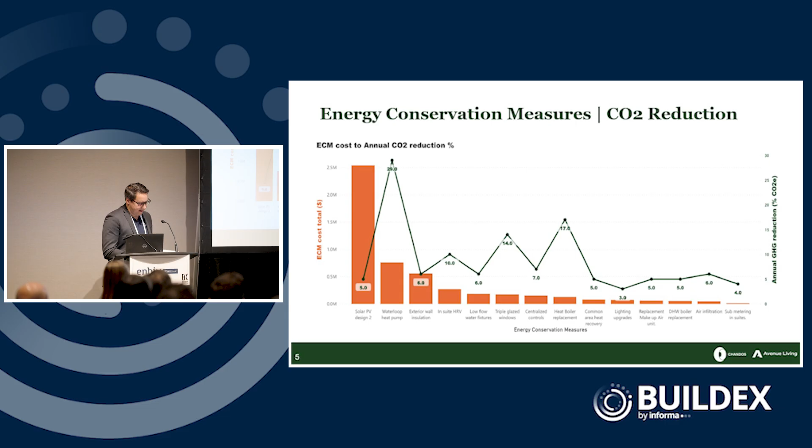Again, I think we're distributing these slides, so you'll get copies of all this, so I won't dive into too much detail on what we're doing here.

The next challenge we face is around decision making. We're living this in real time with phase 2 and 3 of our CIB program.

We're looking at probably 40 different properties. Each has an energy audit completed, and each property has a list of ECMs that we can select from—more or less a menu. Now we're in the optimization stage, trying to figure out which ECMs by property, and which buildings as a whole, to include in the program.

It's harder than we expected—really balancing GHG reduction and construction costs, since those are two items in tension.

The next challenge we face is investment modeling. I'm not sure if people have had projects axed because there isn't enough return created or enough savings—it's a challenge for us. When we first look at the savings, if you take your utility savings and the cost of construction, generally that simple payback just isn't interesting enough to get a yes on the project.

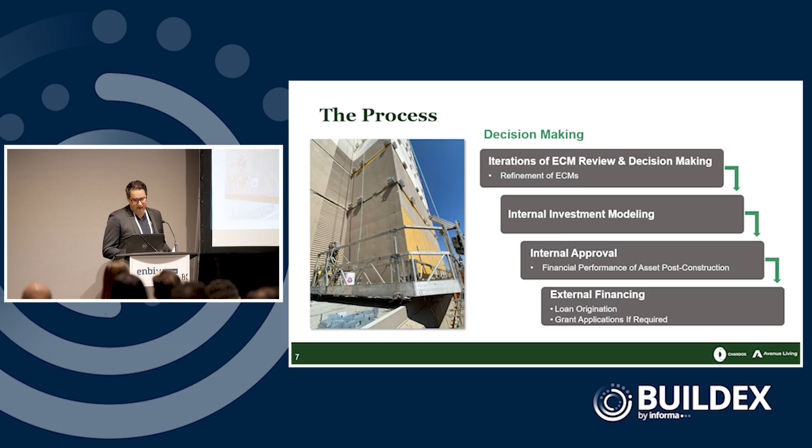Internal approval, for us it's straightforward. We have an investment committee, but knowing your approval path is very important to understand. At this point, you'd probably be nailing down your financing, getting term sheets, signing credit agreements, and also getting grants if you're able to.

This is my last slide, and we'll get it over to Dustin next. We've also built a program around this. So we talked about the individual process for an individual building, but our program has key components. One is due diligence, so we do energy audits on the properties. We also look at other things like hazardous materials, so we'll do assessments early on for asbestos or mold we might encounter. We'll look at environmental site assessments and building condition assessments as well. So we do a lot of front-end work.

We've built a team around this internally. We have what we call a steering committee for our CIB program. It's multidisciplinary—we have asset management involved, marketing, our operations team. We come together every two weeks or so and discuss progress and challenges. Most of our future projects are also in occupied buildings, so that's another logistical challenge for construction—a lot of communication between our marketing team, our ops teams, and our residents.

Lastly, at this stage you're probably going to start selecting either equipment or contractors. I think probably one of the more important stages is getting projects approved and moving into execution. I'll plug Chandos here—they're a great partner for us in this space. These projects are complicated, merging old and new, with lots of building code issues and unforeseen problems behind walls. So picking a partner you're comfortable solving problems with, having hard conversations with, is important. I'm happy to report we're extending the relationship into phase 2 and 3 of our CIB program with Chandos.

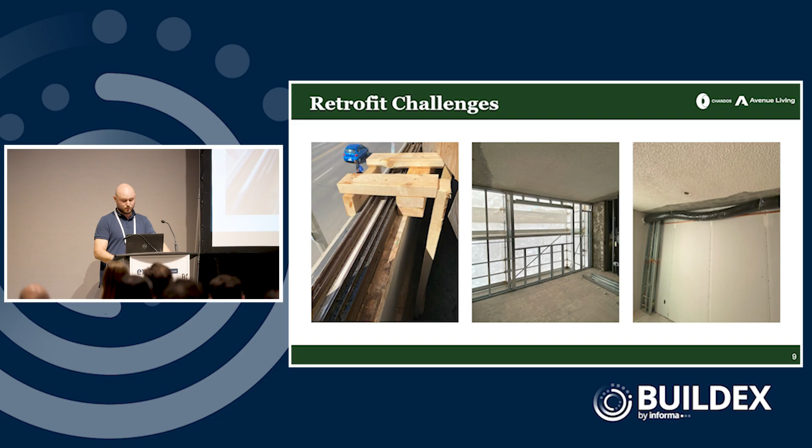Project delivery: for this project, we utilized a CCDC 5B construction management contract. This delivery method allowed for early contractor involvement via pre-construction services. Chandos was able to provide site investigations, value engineering, constructability reviews, and mitigate risks. We were also able to onboard design-assist mechanical and electrical contractors, allowing us to procure long lead time items such as the makeup air unit, boilers, and start the queue for the MDP retrofit, which was a 10-month lead time. This delivery model provided cost transparency and flexibility for the owner. Chandos, as the CM, worked alongside the architect, consultants, and the owner, Avenue Living, as collaborative partners. This promoted a team-first culture where everyone was working towards the same budget, schedule, and quality goals.

Envelope commissioning: with the previously mentioned 64% greenhouse gas reductions, these final reductions are measured based on the final building usage post-construction. However, to validate some of the energy conservation methods implemented, we provided air infiltration testing. The targeted air tightness was 1.5 liters per second per square meter at 75 Pascals. We achieved 0.95 liters per second per square meter. We also facilitated water penetration testing in accordance with ASTM E1105 standards, and we exceeded the 290 Pascal requirement, passing testing up to 360 Pascals.

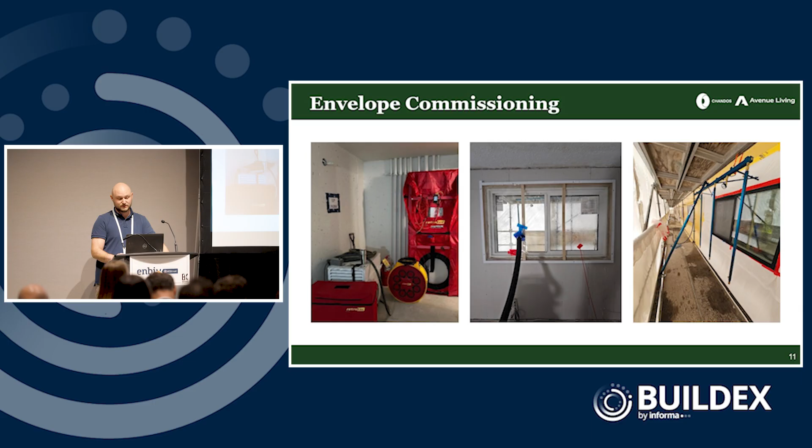Successes. With this project being the first BIPV project in Western Canada, that's a success in itself. We're solidified as part of the Edmonton skyline.

It's crucial to mention that this wouldn't have been possible without the high level of communication and collaboration between Chandos, Avenue Living, consultants, and subtrades. We successfully navigated 336 RFIs and 217 approved change orders over 14 months.

Through the process, we developed a strong owner-contractor relationship built on communication, transparency, and trust. Lastly, the project was nominated for and won the Chandos prestigious DBO Award, which recognizes outstanding project teams that reflect the vision of Chandos co-founder Daniel B. O'Brien, focusing on operational excellence, inclusivity, collaboration, innovation, and courage. Truly a testament to the project's success.

Lessons learned. So this is a bit of a bigger one. Pre-construction's worth it. On the SunRise project, Chandos facilitated over $2 million in value engineering over the 4-month pre-construction process.

Avenue Living saw firsthand the benefits of early contractor involvement and has onboarded Chandos in the very early design and validation stages, working in a modified CM contract for phases 2 and 3 of Avenue's deep energy retrofit portfolio. That's looking to target approximately 40 to 42% GHG reductions over 38 buildings between Edmonton, Calgary, Camrose, and Lethbridge. Early contractor involvement allows for thorough site investigations to validate the feasibility and constructability of these conditions.

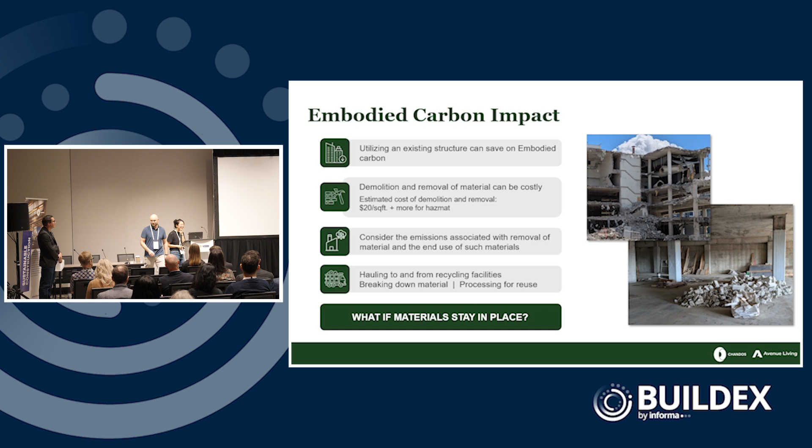Okay, before I get started, who here is excited about embodied carbon? Yay! Okay, cool.

So it's really interesting, like this project, when we took a look at it after completion, we realized what was achieved - an existing building that was revitalized and brought back to life, where it needed so much work to bring it back to this level of quality. And we thought, how much embodied carbon does that save to actually do this instead of having to demolish it, ship away all the materials, bring in brand new materials and rebuild it? So we thought we'd do a little study.

So I'm just going to go through a little bit of a nerding exercise. What I think is really interesting is embodied carbon is going to be in our national building codes by 2030, so we want to get that literacy out there. We want to start to understand how and what we can build, and how we can do it with the lowest impact possible.

So this is just a little bit of an exercise that our team did to see what we could do. Let me make sure I got the right slide up here.

By utilizing an existing structure, we could actually save a ton of that framework. Not only does it save a ton of money, like about 30% of structural cost to rebuild a new building, we also looked at the amount of embodied carbon we can save by reusing a long-term durable concrete frame.

We also looked at the demolition of that building that we would have had to take down to replace. What does that save a project? How much material would we end up with? I did some research and validated with some folks, about $20 a square foot, so you can imagine that cost adds up.

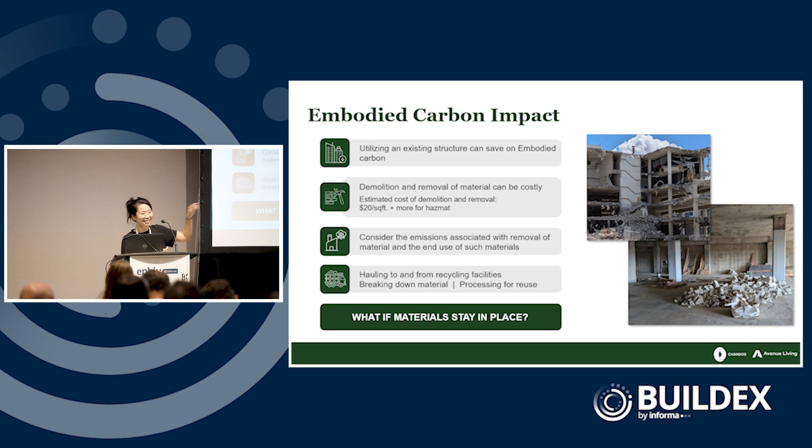And so what if the materials stay in place? This was fun, looking at the existing building and all the old existing drawings and some of the new. We leveraged as much of our bill of materials, our takeoffs, and manually measuring really old scan drawings, which is really fun. But we ended up looking at some quantifications.

So the floor structures, columns, external concrete walls, and masonry reinforced walls on the drawings, and what we saw on site had this kind of amount. I just allocated, for the floor structures, we typically look at a 30 MPa concrete, type N, because it's not exposed to air entrainment. Columns, I allocated about 40 MPa because it's a higher rise, but it's a very efficient structure.

External concrete walls, these were really interesting. By quantifying all of those, we have about 524 cubic meters, and these were solid walls that we kept in place. And then there's some masonry reinforced walls that were still in the building on the drawings, so we maintained that and did a takeoff of the unit calculations on those.

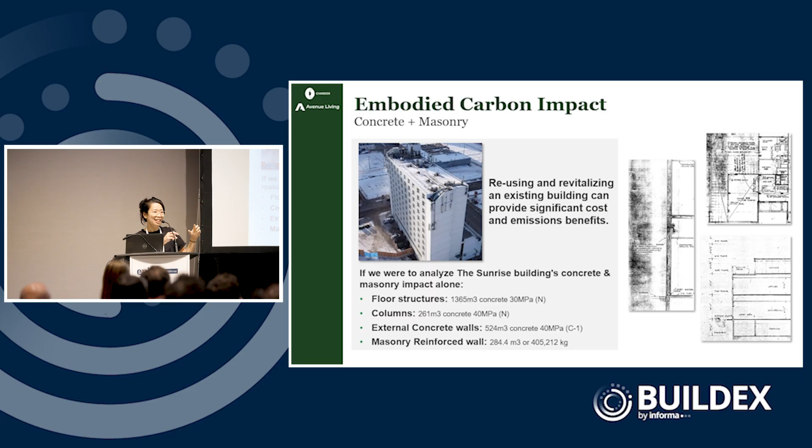So a lot of metric transferring, a lot of math, and a lot of making sure I got my calculations right by checking it on ChatGPT.

So how this came about, we started looking at like, what can we measure? We can't measure everything, because if we avoided something, it's so hard to quantify what you didn't do. What we do know about is the materials we can take off. So on the concrete and masonry, by reusing it, we avoided replacing it with 800,000 kilos of CO2 emissions.

So imagine not having to burn that much diesel, and that's what we saved just by reusing the concrete portions alone. I didn't even calculate rebar, because that's a bit trickier, it's harder to find historic information on. So we can only measure what we know or what we can quantify.

So for us, understanding that this is about 170 trees grown for 10 years, that's the amount of carbon we've avoided just in the concrete.

Oh, thank you, ChatGPT.

So the next thing we thought we could study was the envelope. Understanding that BIPV has an upfront carbon cost to it, we do have to manufacture materials, but the envelope needed replacement. It was falling apart, and so if we were going to do that, what does it take?

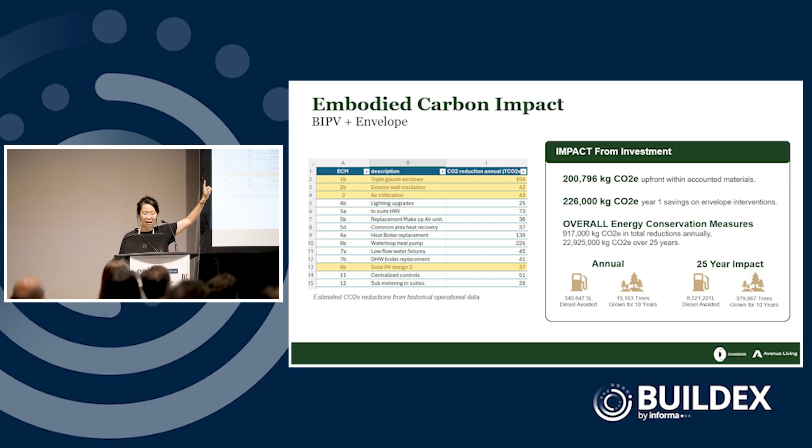So by looking at the total reductions annually for each of these interventions from the ECMs, looking at the upfront carbon, when we deduct that, we still get a really great outcome. Annually, we avoid about 340,000 litres of diesel just on the envelope upgrade alone. I'm trying to use that as a way you could imagine how much emissions that would have cost the planet. And if we look at it over a 25-year impact, we're talking about 8.5 million.

And that's the life cycle of the envelope, if not more — it can continue to provide more. With the comments we had earlier in Neil and Dustin's presentation, there's lower maintenance, and you get more occupant comfort, so they're not likely to turn up the thermostat because they're not feeling drafts. All of these things sound expensive now, but over the life cycle of 25 years, understanding the blend of OPEX and CAPEX is really critical. I know traditionally these two are separate, but we need to start breaking down those barriers and really comparing the two.

So that brings us to the end of the slides. I don't know if we're early, but hopefully there's a lot of questions. Thanks, everyone.